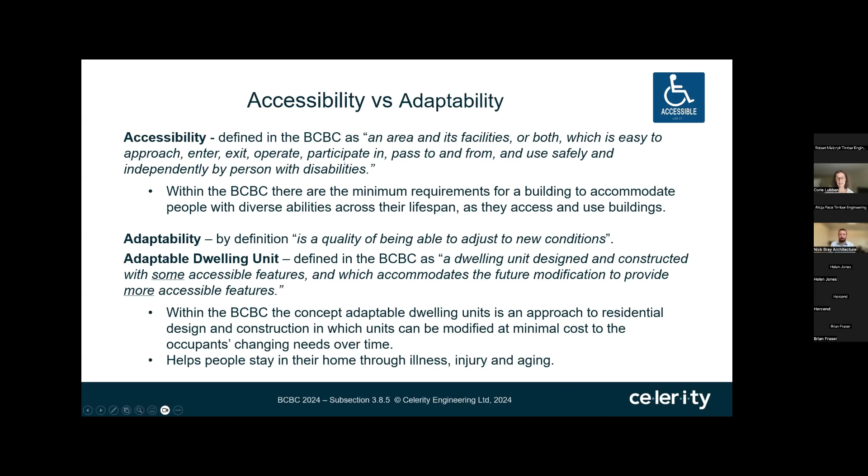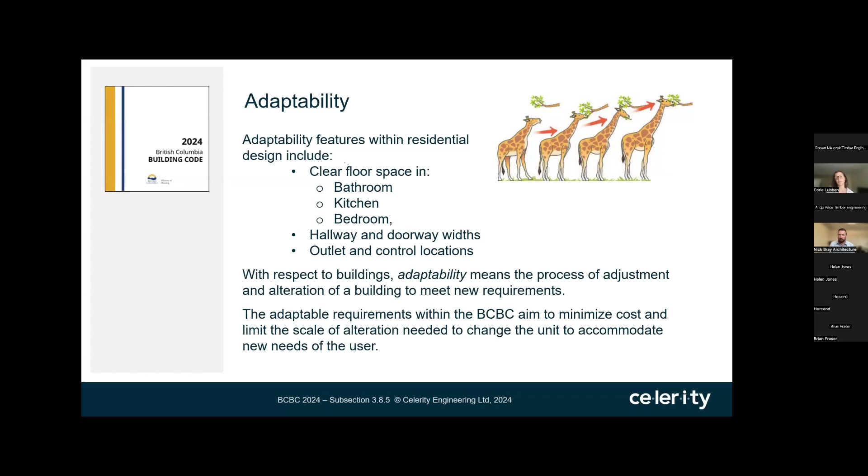Some requirements we're looking for are heavily focused along clear space, thinking back to the intent of these adaptable units and being able to accommodate future modifications. Clear space isn't something we can just magically create, so a lot of the requirements focus on providing that clear space, concentrated in the bathroom, kitchen, and bedroom. We're looking at hallway widths, door widths, and locations of outlets and controls. The adaptable requirements aim to minimize costs and limit the scale of an alteration needed within the unit to accommodate the user.

The adaptable dwelling unit requirements can be found in subsection 3.8.5. They are applicable to one-story dwelling units served by an accessible interior public corridor and an accessible common building entrance. Moving forward, as of March 10th, 100% adaptable units will be required in residential apartment buildings over 2 stories, or residential buildings larger than 600 square meters. This is a significant increase in impact on our designs. The micro suites we've been seeing may no longer be feasible based on this new clear space required throughout.

I want to emphasize these requirements do not apply to detached houses, semi-detached duplexes, triplexes, townhomes, row homes, and boarding houses. There is a requirement for those building types to have at least one bathroom with walls reinforced to accommodate future installation of grab bars, but aside from that, it's not the intent. I also want to highlight that these adaptable unit requirements don't align with the VBBL at this time. We know the Vancouver bylaw is coming up with a new edition shortly, and we're hoping they will align, but like everything, we'll know it when we see it.

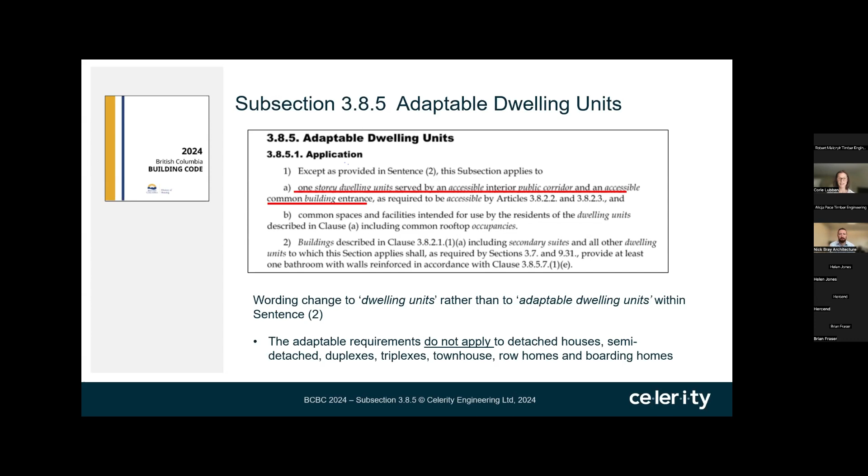Moving into the construction requirements, there's not a significant change here. This article simply states that the construction of adaptable dwelling units will conform to the subsection and the accessible requirements. What we do see is an inclusion of clarification.

All this clear space required for different parts of the building is now permitted to overlap. Whether it's a turning radius within a bedroom, a door clearance, access to the closet, or a pathway, as shown in the picture on the left, it's all clear space. We can use that for anything—we don't need to separate each individual component of clear space.

Within this article, there's also a little bit of clarity on what rooms apply. It doesn't require specific rooms in a dwelling unit; it just states if there are rooms and they're within here, they should be designed to be adaptable.

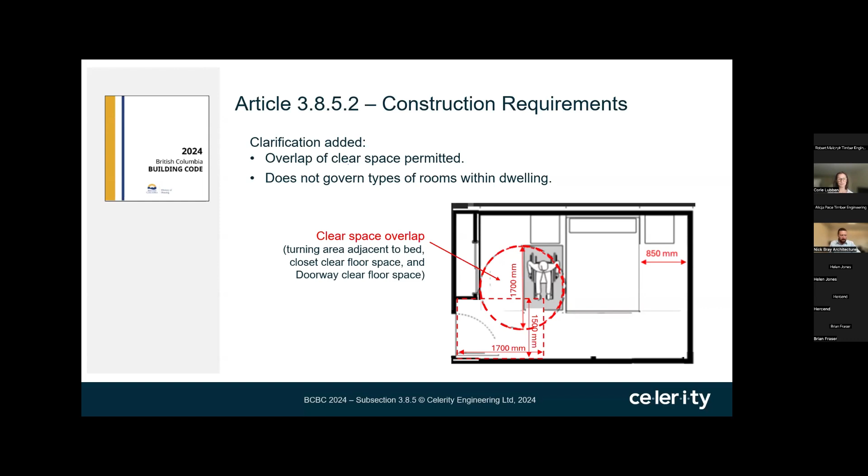Next is the building access requirements found in Article 3.8.5.3. This states that access is going to be provided to common areas, spaces, and all common interior and exterior paths of travel serving the adaptable dwelling units. Anything not intended for residents—common spaces and paths—are excluded from this. There's an inclusion for increased lighting to 50 lux in the floor area for common corridors and passageways, which exceeds the 10 typically provided. There's also a provision for special outlet boxes in the adaptable dwelling units, for the future provision of strobes.

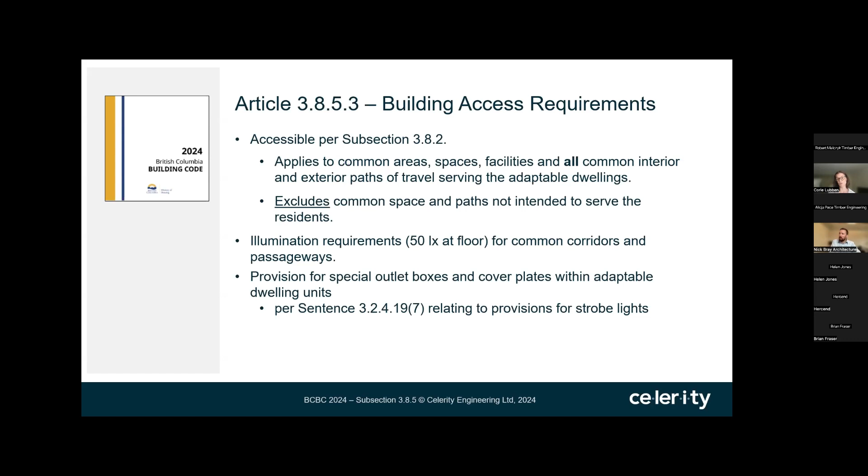For doorways, we see a revision here. This is consistent with the rest of our design requirements in 383, but the 850 clear width is required not only at the entrance door, but with interior doors as well. As shown on the top right of the screen, this reminds us how we measure that clear width—it's the clear opening, from the stop to the open part of the door.

As with all doors, we need a clear space around them. This article references and is consistent with the design requirements in 3.8.3.6. If it's a pull door, we need 1500 by 1700 millimeters, and as shown in the picture, the orientation of this clear space isn't fixed. As we move to the push door, the orientation is fixed—we need 1500 perpendicular to the door, and the clear width parallel is 1200.

There's a provision allowing you to reduce these widths if a power door operator is provided, or even just provisions for a future install of one. You can reduce it to 1500 still perpendicular, but reduced down to a meter parallel to that door.

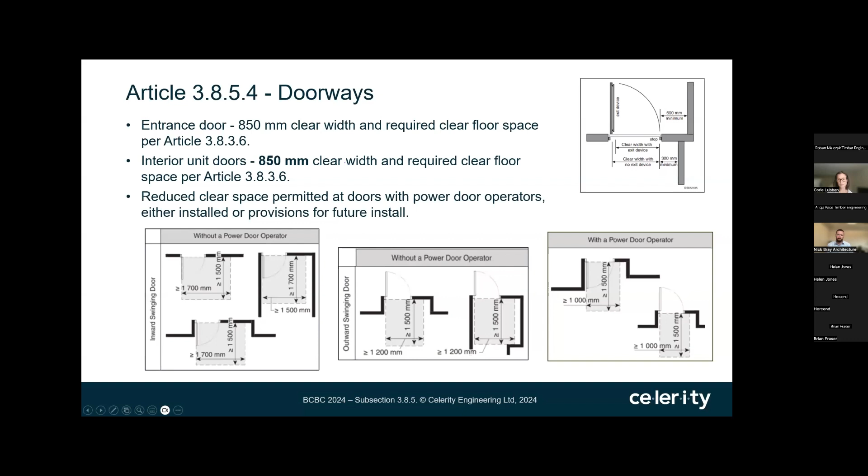And then we have some hallway and corridor requirements. This is new inclusion into the adaptable unit requirements. It defaults back to the requirements within 3.8.3, our adaptable or accessible width of 1 meter. This was an interesting inclusion, and we don't see it a lot throughout other buildings because we're governed by our egress width of 1100. But here with the adaptable dwelling units, these requirements apply within the suite, so we'll be looking at that 1 meter for corridors and hallways. There is an allowance for that to be reduced to 850, just for small indentations of 600 millimeters or less.

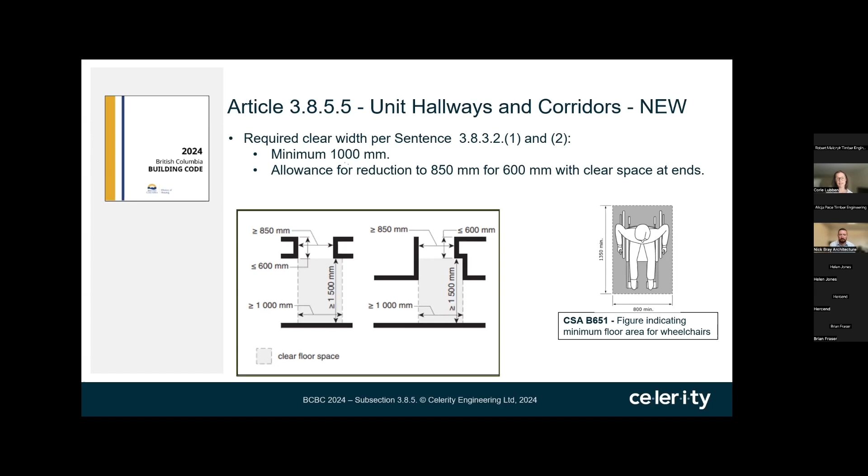Bedrooms is another new one. It requires that 1 bedroom in an adaptable unit be provided, consistent with the requirements in the code. This bedroom should be designed to accommodate a bed that sleeps 2 people. Consistent with our occupant load, we have 2 people per sleeping room, so a bedroom designed to be accessible should accommodate a double bed.

The requirements specific to the bedroom look for a clear space of 1700 millimeter diameter, or 1700 by 1500 millimeter clear space. The wording within this article is a little vague, and it says it could be adjacent to the bed. When you further read into the notes, it seems like the intent of this is to help with the transfer into the bed, so adjacent to the bed seems like a logical and helpful location, but again, that's not specifically written in the code.

The next requirement for a bedroom is a clear pathway of 850 wide, and this is not to be obstructed by furniture, just to provide use of a bedroom. This would be applicable, especially if there was a window or something on the far side of a bedroom. Everyone needs to functionally use that space.

And then the last requirement within a bedroom is closets - the clear width of a closet opening, 900, and then a clear space in front of it, similar to that 1700 millimeter diameter or the 1700 by 1500 millimeter open space. Again, this references our allowance for overlap, and as we can see, this is a large area provided, so overlap of those spaces is permitted and definitely beneficial when designing a room.

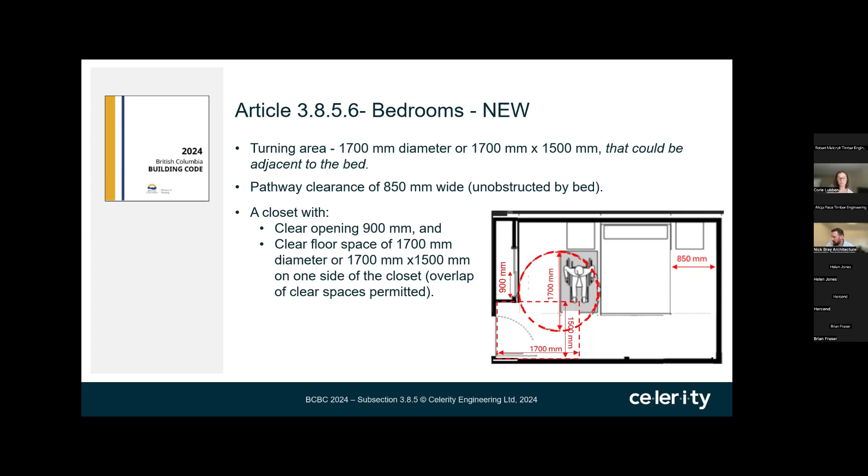Bathrooms. The design of a bathroom often requires a little bit of extra attention. We have more plumbing, different fixtures that come into play and that may need replacing. So the goal here is just that if we have to retrofit a bathroom, we can do so without major renovations. The requirements within this article lean towards a clear lateral transfer space beside a toilet.

Again, more room - we have the location of the water closet within a proximity to an adjacent wall. This is where we'll have the future grab bar locations. The other requirement is for plumbing systems to accommodate future installation of an accessible sink, an accessible shower or tub, and these are not permitted to impede the use or space of other fixtures within. So plumbing systems, as clarified in the notes, address the water supply, drainage, and venting systems. Again, we just want to be able to replace the systems without major impact and redesign.

This one has been brought to our attention, especially drains - a drain for an accessible bathroom sits a little bit different than a drain for a shower or bathtub. So these things caught early and designed early can really be beneficial. The last requirement is that we have walls reinforced for the grab bars, adjacent to the toilet, as well as the shower and tub.

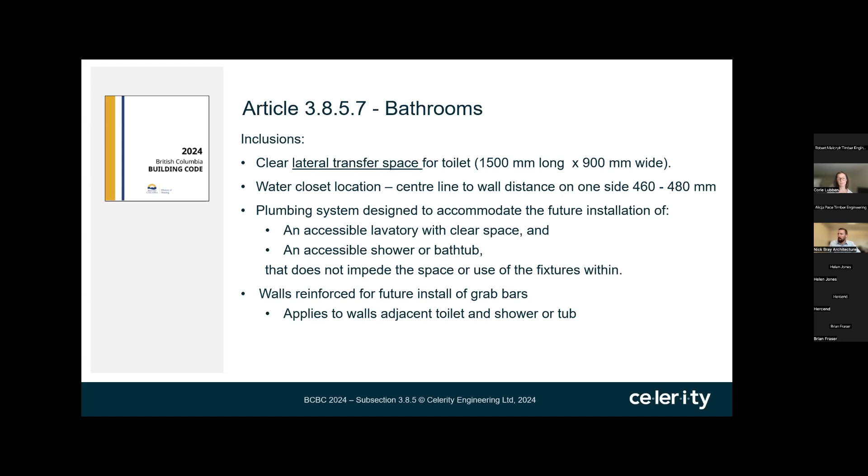And then we have kitchens, another area we need to accommodate with adaptable requirements. There is a requirement within here for the sink and cooktop location - it says adjacent or with a continuous counter. This one is in the code just for usability; I'm not sure how strict we are on this. We have not seen these types of requirements for placement of these two features in a kitchen. No, the CSA B651 doesn't specify the location of these two fixtures, so if you had a parallel kitchen, one could be on one side and one on the other. But based on the code, adjacent typically means touching, so we're just going to be conservative and assume they're all going to be on one counter, either beside one another or adjacent.

The other revisions within a kitchen, we need clear space - again back to the 1700 diameter or 1700 by 1500 millimeter. This is usability within the kitchen. We want it designed to accommodate the future install of a kitchen sink, so here the focus would be on knee clearances and locations of the plumbing, vent, and drain.

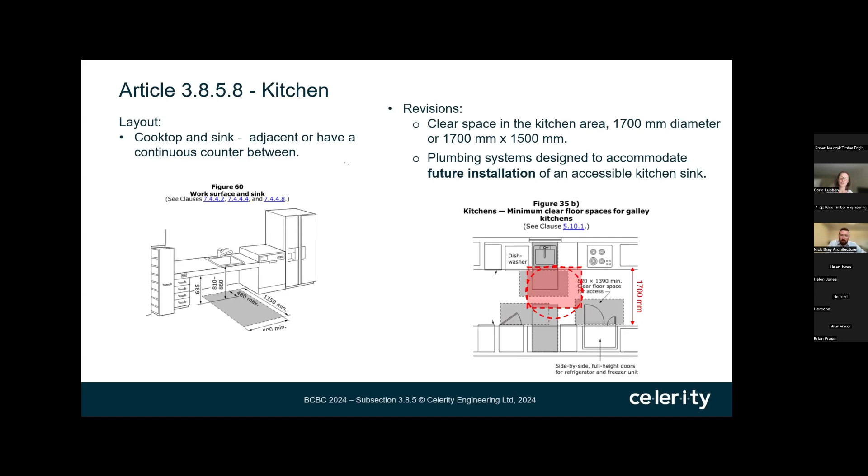When we talk about kitchens, we often have a design that includes that popular island feature. Is that still possible? It comes down to the interpretation between fixture and furniture. In our opinion, a design with an island is definitely still possible, but we'd want it on the furniture side so it could be removed without impacting functionality. You wouldn't have appliances, sinks, plumbing, or electrical going to it. We'd have finished floor underneath so it could be removed and clear space provided. This is open for interpretation, but it seems to meet the intent—a furniture island would be permitted, not necessarily a plumbed-in fixed one.

The last requirement within the adaptable units falls on controls, switches, and outlets. There's really no significant change here. Our reach requirements have been lowered—the minimum location is now 400 millimeters, down from 450, and up to 1200 millimeters above the floor. This applies to things that we're using, and it does exempt controls dedicated for equipment or appliances.

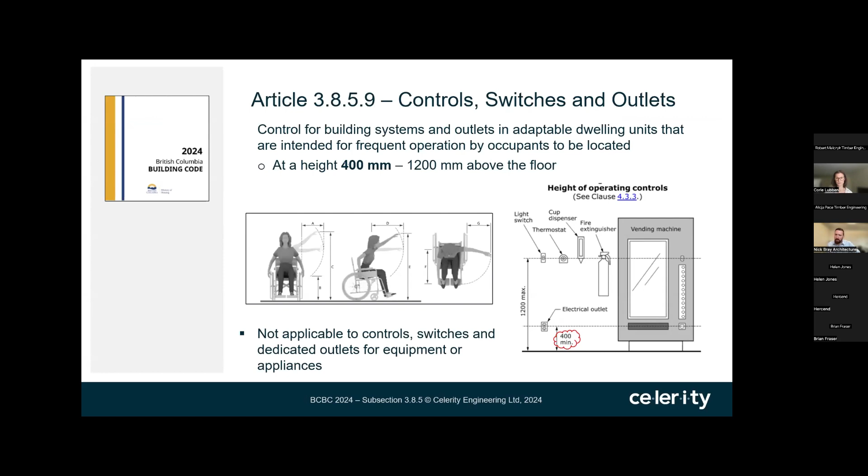As we conclude the adaptability requirements within 385, I wanted to bring attention to other design aspects worth considering. One is window location. The BCBC has no requirement or reference for window location, but the CSA B652 adaptable dwellings standard references that one window should be provided in each room, located not higher than 750 millimeters from the finished floor, with an exemption for bathrooms. This requirement is reiterated in the VBBL. Here we have one window, in the living room, located 800 millimeters above the finished floor. It's not in the BCBC, but it's a functional and significant item if someone in a unit wanted to make a revision—so these are things to consider as we move into design.

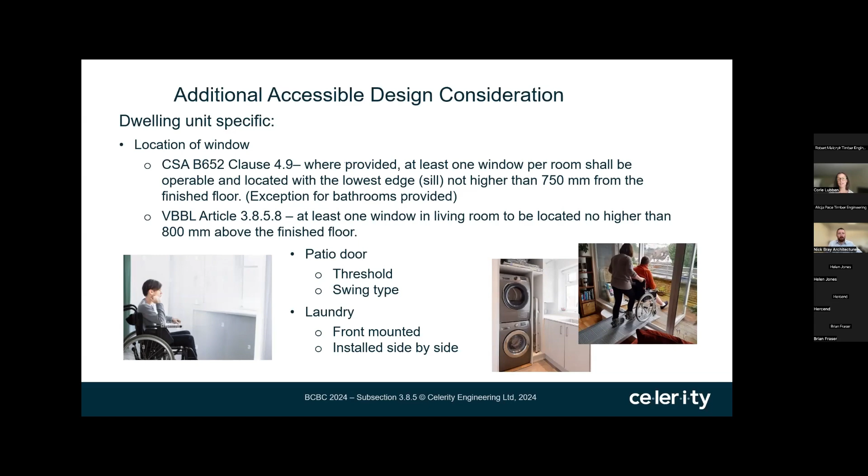Patio doors often bring up another issue. It's a gray area—there's no requirement for it to access directly onto the balcony or patio, though looking at the patio door threshold and swing type early on may simplify the unit and make it designed for all. Another funny thing people notice in units designed to be accessible is stacked washers and dryers—unfortunately the upper unit often isn't reachable for people with limited mobility. We're not saying they need to be side by side, but maybe allocate space so that option could be available. These are mindful design criteria, not enforced, but things to keep in mind.

Now I'd like to reiterate the accessibility design standards and references out there. We now have the CSA B651 2018 edition, the accessible design for the built environment. This is now included in the 2024 BCBC as a direct reference, making that standard enforceable. There's also a new 2023 edition of the B651 that didn't quite make it into our 2024 code, which gives us a chance to look forward and see what's coming.

This table highlights some of the clear space requirements and differences. The turning space bubbled on the far right is 2.1 meters, whereas right now a lot of designs incorporate 1700. When we feel that 2.1 meters is big and try to avoid it in our design, remember that based on design and user feedback, 2.1 meters is preferred—so we shouldn't grumble about giving up the extra space versus 1700. Within the 2023 edition, all requirements associated with accessible dwelling units have been moved into a new standard, the B652. Again, these are just standards used as guidelines and not enforced.

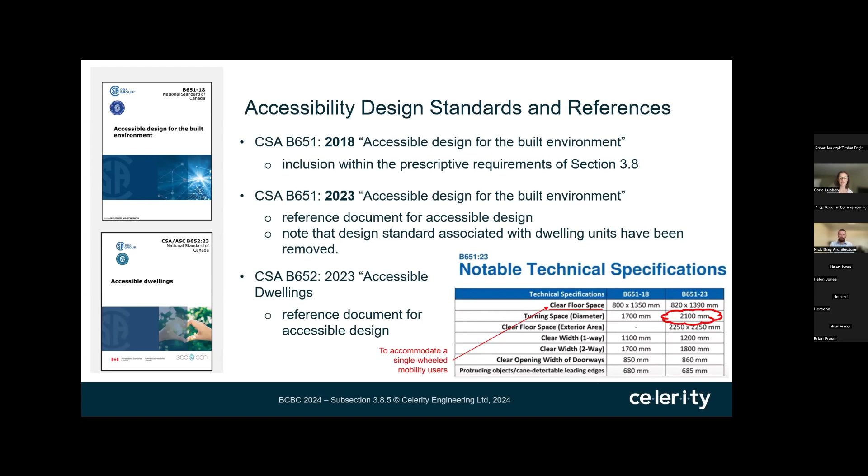Before we close, I wanted to touch on impactful changes within the accessible requirements. Dwelling units are required to be served by an accessible path of travel, both interior and exterior. Within section 3.3.2, accessible paths of travel, there's a new requirement addressing long corridors, which depends on the width of your corridor. There's now a new inclusion for a turnaround or mobility zone, which comes into play when a corridor is more than 12 meters in length.

And if the corridor is not 1500 or more, we do need to incorporate a turning zone at the end. Once we have corridors greater than 24 meters, we actually don't care about the width of that. We need this turnaround zone or maneuver zone regardless, and that has to be incorporated at intervals not greater than 24 meters. It's a 1700 by 1700 millimeter space.

Secondly, I just want to highlight the changes in the exterior walks. We have an increase in our width required on the outside of the building. We're looking now to provide 1600 millimeters. There's added clearances around entrance doors on the exterior where we go to that 1700 by 1700 millimeters.

And we do have a direct reference here where we are required to comply with the CSA B651 requirements for exterior walks, and the provisions there include a broader scope than previously within the building code. We're looking at overhead obstructions, separations from vehicle walks, specific requirements for tactile attention indicators and where bollards are, and separation distance between them. Just a lot more things to incorporate, and this isn't to go over them all, but just to be mindful we need to dig into these deeper as we move forward.

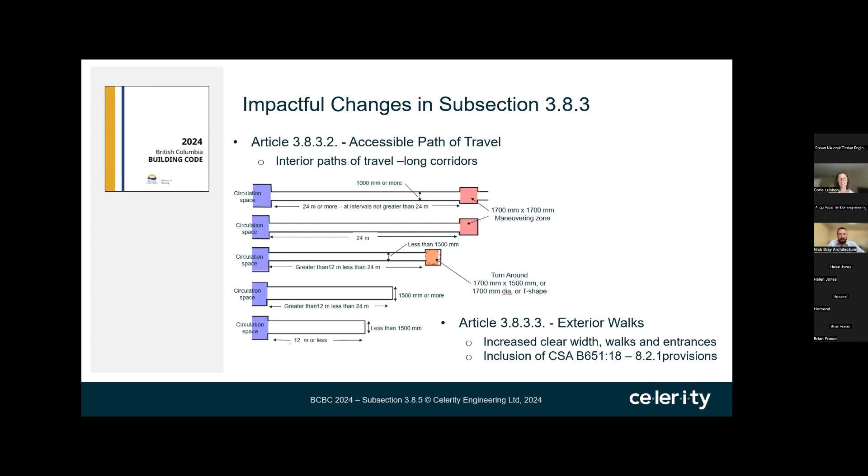And I think that sums that up for a quick deep dive into the adaptability requirements from our end.

I'm not sure if we want to take any questions now or if we're just going to leave those to the end. We've got 5 minutes now to just talk through some questions here that we have. But before we get into that, I just want to say that there's still a lot of things we're unclear about that we need clarity on from BSSB, from the BC government. We can only present what we actually know to be written in the code right now. But I know, for example, there has been talk about the requirement for a double bed and the requirement for a space on both sides of the bed. It's looking towards, and I'm not sure if it's been confirmed or not, but it's certainly been discussed, talk about that only being required on one side of the bed and it not necessarily being a 2-person bed that is required. Again, we can only really present what has been written in the code at this point or confirmed at this point. But just be aware that we are seeking clarity on a number of issues, and maybe we can keep you updated with those items.

Just to start on the questions here, a question from Tina: does the BCBC include requirements for windows that are accessible? For example, latches for swing windows are at the height that a person in a wheelchair could reach to provide fresh air to a room. I think that's kind of just built into it - obviously, as we said, the BCBC doesn't have a requirement specifically for windows. The VBBL and the CSA B651, who reference a window in their location, they do say operable. So if it's an operable window, I think that leads to the fact that whoever is trying to use the window would be able to use the operable features of the window.

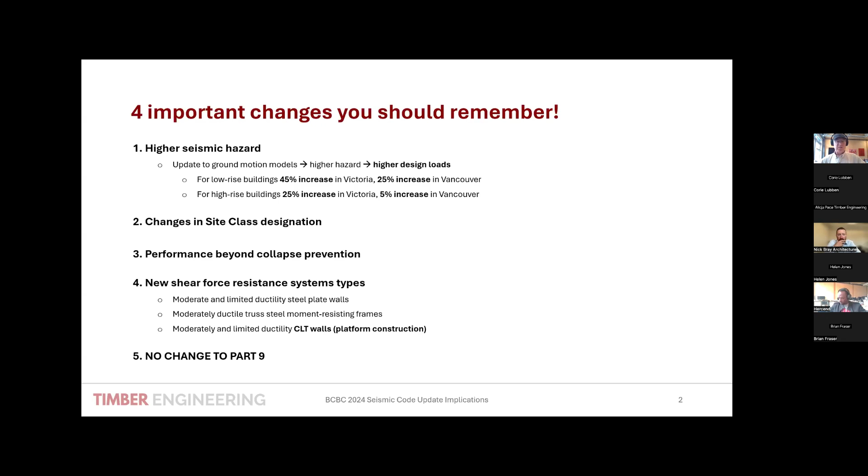So we have designed CLT shear walls for the last 15 years. Now they're in the code, and now there is this big change. And no changes to part 9.

So what does it mean for developers, architects, designers? Buildings will become more regular in geometry. There will be more walls lining up, especially shear walls. There will be more shear walls. Transfers, irregularities, they will become much more expensive and harder to design.

Other systems like CLT shear walls will be mixed together with load-bearing wood framing walls because it will be much harder to use these wood framing walls as shear walls, even with the rods. We already see projects with tons of built-up posts. There simply will be geometries that it will not work.

And the other big thing is that the geotechnical engineers will be hired at the design stage. More and more of this is already happening, but now this information will result in huge savings to the design.

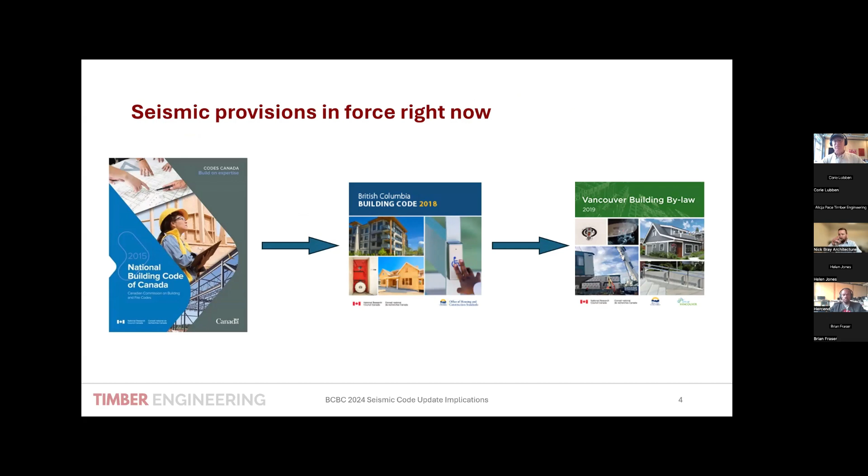So that's how it goes from National Building Code into the BCBC, into the Vancouver bylaw. That's how it was before. And that's what's going on now.

So we are already getting into BCBC 24. We still don't know exactly when Vancouver will adopt it in the bylaw. But the process is the same as last time.

So how was it before? We started with 1941 with the first national building codes in Canada. Then we went pretty much to the 1980s. In the 1990s, when I graduated from UBC, we were starting seriously to design in seismic, but in reality it was...

The 98, 99, and especially the changes into the StructE designation, which we had to pass these additional exams in early 2000s, a lot of it was about seismic. So in the 2000s, we really started doing it more.

And now with 2020, 2024, what's important to remember here is that the load path and the requirement for this load path was always kind of stated. Now it is in the code. So now I will pass to...

Alicia, and she will be talking about the key concepts. Hello everyone, I want to just introduce a few technical concepts that are important for us to really understand where all of these big changes are coming from.

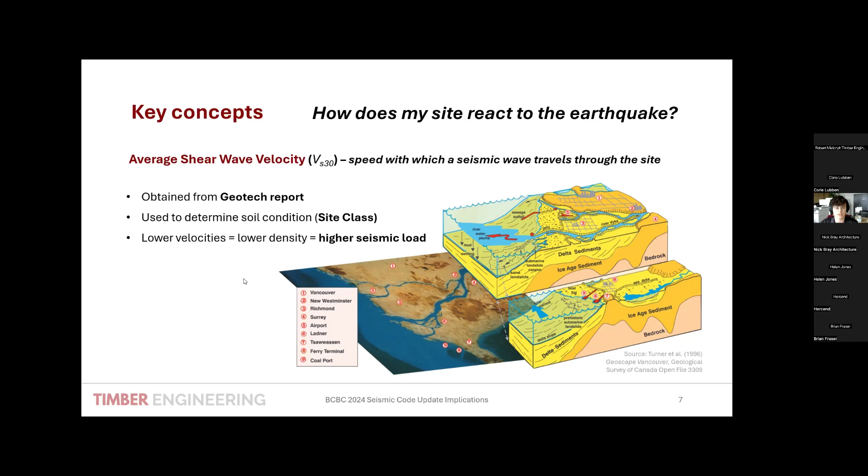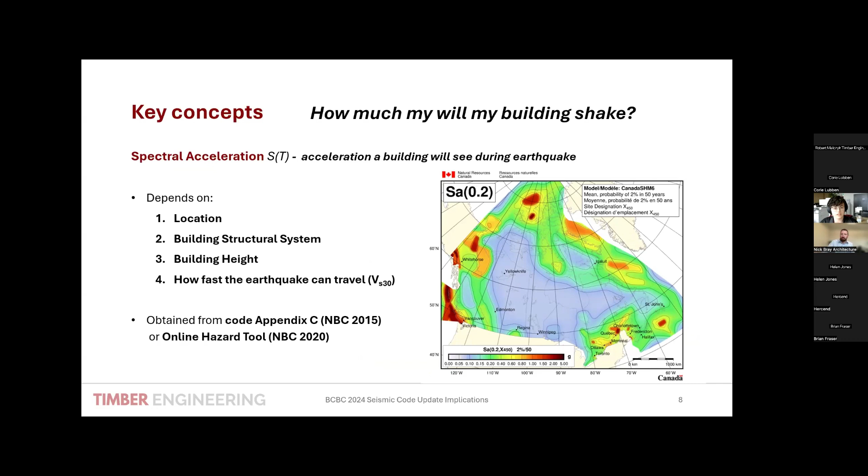Then the second important concept is, of course, how much will my building shake? This will depend, of course, on the location within the country, with higher seismic zones being closer to the potential epicenters. It will also very much depend on the structural system, the height of the building, and the concept I've just introduced, how fast that earthquake can travel through our site.

Typically, all of this is encompassed in our spectral acceleration. And that value of spectral acceleration, historically, we've been able to access it from an Appendix C, but now from the 2020 NBC and consequently BCBC 2024, this will be done through an online hazard tool.

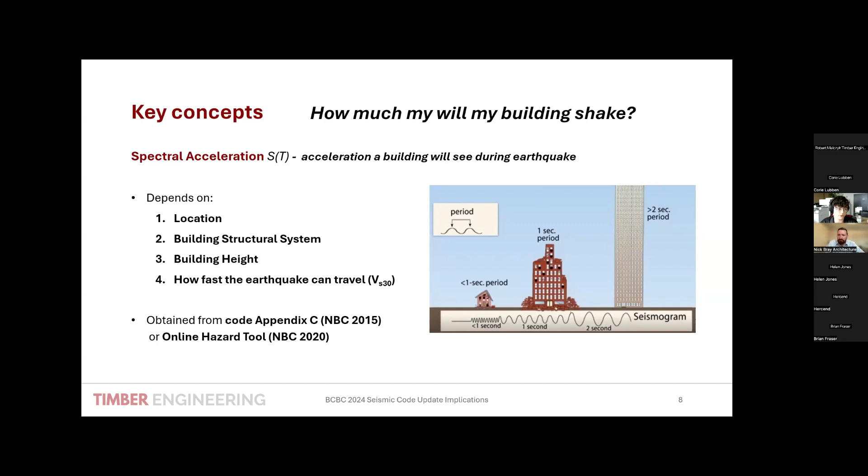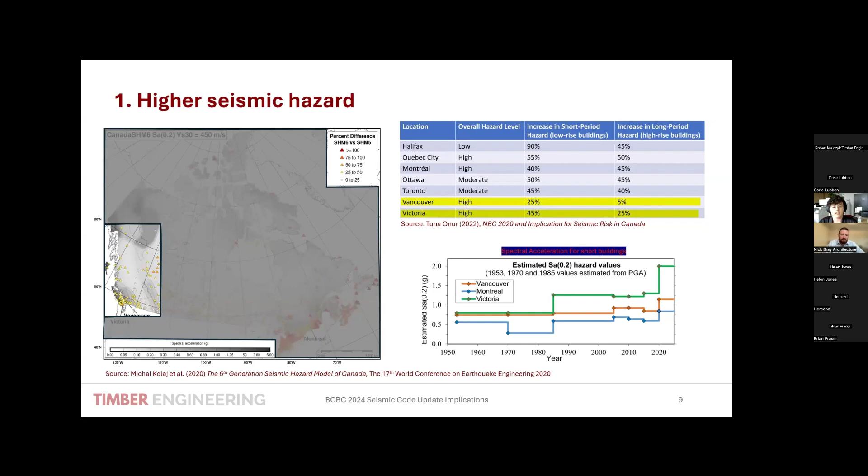Just to zoom in a little bit on what changes are to the seismic spectral acceleration values. This is the map on the left-hand side, where you can see across all of Canada. But of course, we're focusing a little bit more on our local BC. And as Robert already briefly mentioned, when we think about the two most important cities for us locally, especially seismically, Vancouver and Victoria...

25% increase in that spectral acceleration for low-rise buildings in Vancouver and 5% for high-rise. And then for Victoria, this is 45% for low-rise buildings and 25% for high-rise.

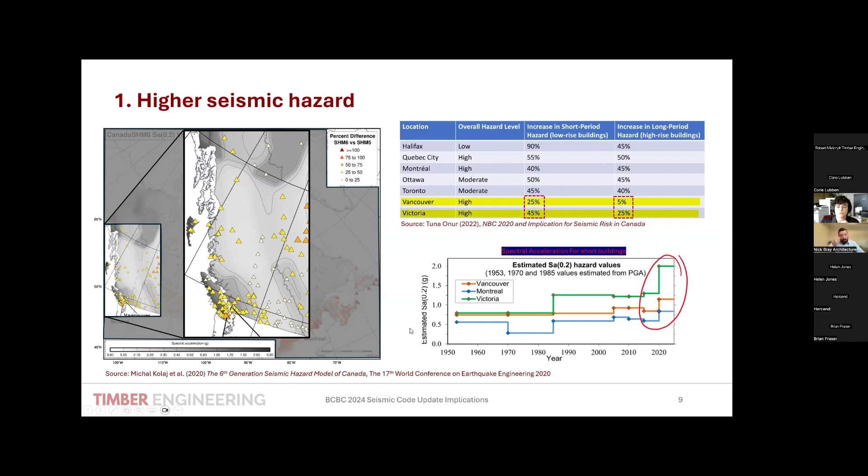And just to underline, because this directly impacts the spectral acceleration values, it directly impacts the calculated loads on the building. I also would like to highlight that, as you can see at the bottom right corner, this is one of the biggest peaks that we've seen in those ground motion models in terms of hazard values throughout the years. And therefore, it is going to impact the way that we will design quite significantly.

Going back to that online hazard tool, the ground motion models are going to be much more site-specific now. We used to have just under 700 data sets in that appendix I mentioned. Now we have over 300,000 data sets, so there will be variation not just between cities, but within the city itself. It's going to be very focused. This is why we have the online hazard tool instead of an appendix, because it's incredibly hard to fit 350,000 data sets in an appendix.

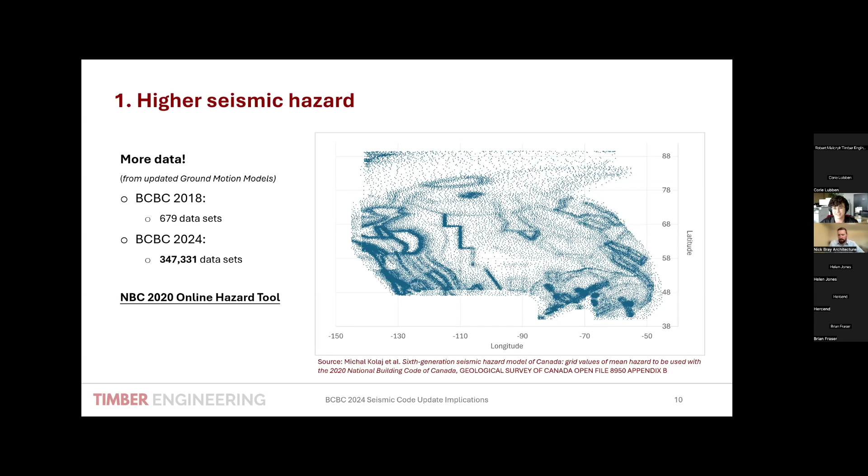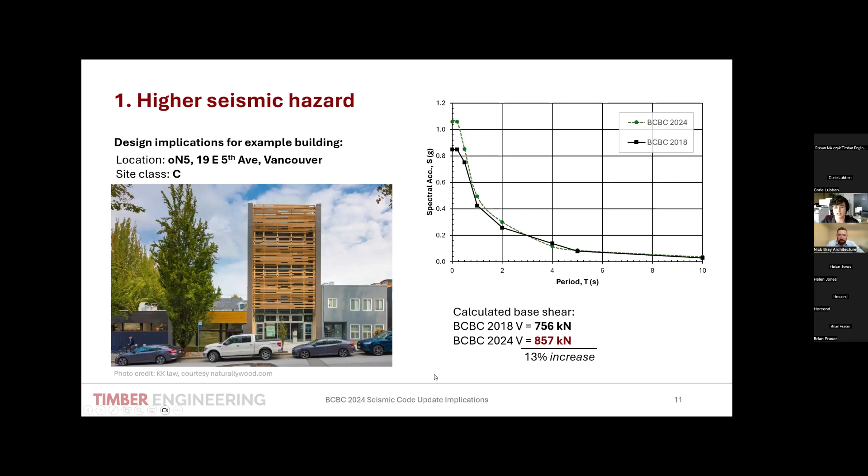Just to show how this will work for an example design, you can see on the left-hand side an example building, our office, localized in Vancouver. Despite the changes being summarized as a 25% increase for Vancouver in general, when we localize for the specific site, recalculating between the old and new hazard values, we see around 13% increase in base shear values. So it's very important to know the site specifics exactly, and we can preserve a lot of design efficiency that way.

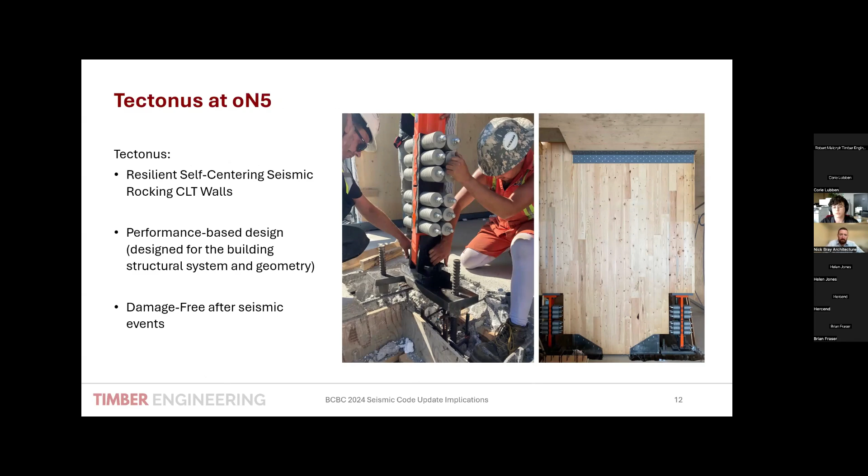In our building, foreshadowing what Christian is going to talk about in a minute, we already designed this structure for performance that is damage-free after seismic events, thanks to the technology called Tectonus, which is installed as hold downs in our shear walls. It allows for recentering of the structure after a seismic event, especially at the lower seismic events that are more likely to happen more often.

One really important thing for preserving the efficiency of our design is that the codes have changed, and it's now designed into the codes that it will be way less efficient for us to just use site class designation. It's still possible to do so, but code designers are really trying to encourage us, instead of the bigger brackets from A to F, to use a specific shear wave velocity.

This is exactly what Robert mentioned - in order to preserve design efficiency, hiring a geotech early and knowing the exact site class acceleration, the shear wave velocity for the specific site, will allow us a more efficient design.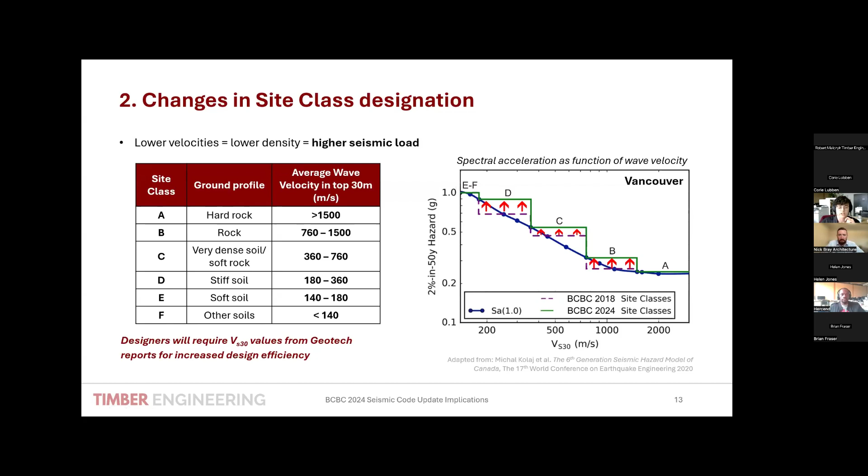With that, the code has never really given any additional requirements except when you have a different structure, like high importance buildings or post-disaster buildings. There are a few key points you have to consider, like increasing the load using the importance factor, or reducing the deflection of the building as it shakes with a reduced drift value, or basically making sure your structural system is regular, efficient, or symmetrical in order to really understand the load path.

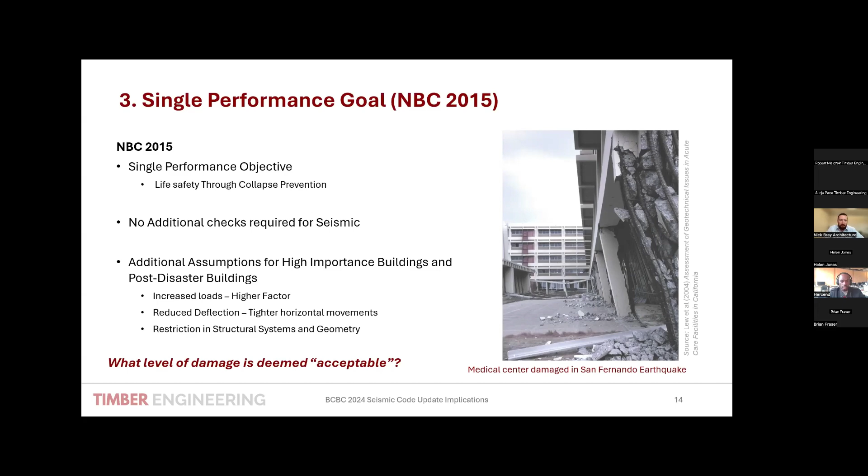So what did the code add in terms of additional performance? The code added another level of safety. In addition to making sure that the building should not collapse, there is an additional requirement that requires the engineer to also check the performance of the building under lower seismic hazards.

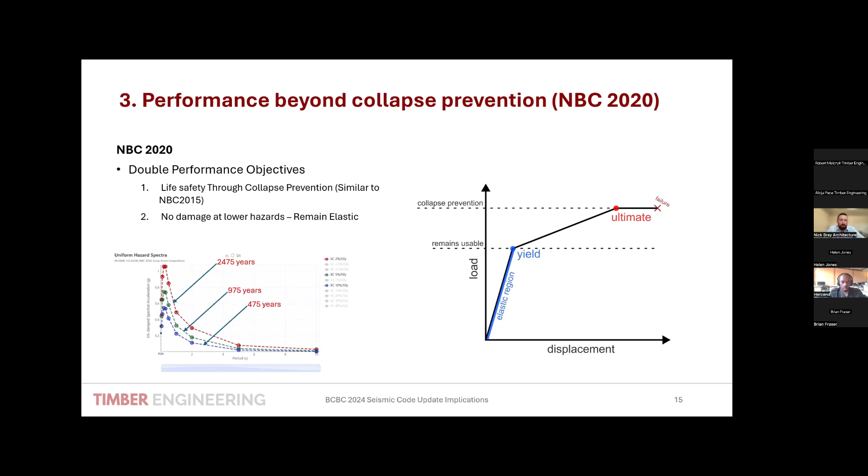So what does that really do to us in terms of design? Now that you are seeing more restrictions, more limits, and now you have a second performance requirement to meet - and as Robert and Alicja mentioned earlier, you actually have even higher forces to design for - what does it mean for the building industry? Now you have to really try to target a much more regular building, a much more symmetric building.

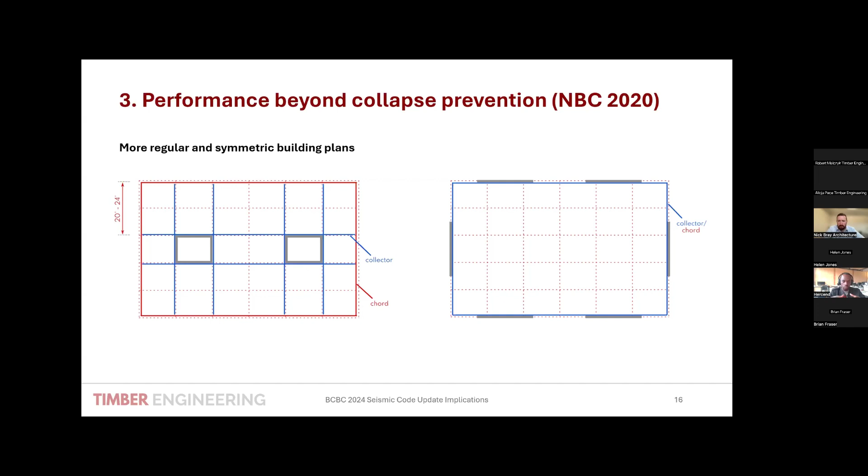You're trying to have something simple and more regular to carry those forces. The main important thing to remember here, and Robert will also mention this on the next slide, is that with those higher forces and higher performance objectives required, you actually have to try as much as possible to avoid any transfer in the lateral load resisting system. So try to have your cores, shear walls, and braces very aligned from the roof level all the way to the foundation.

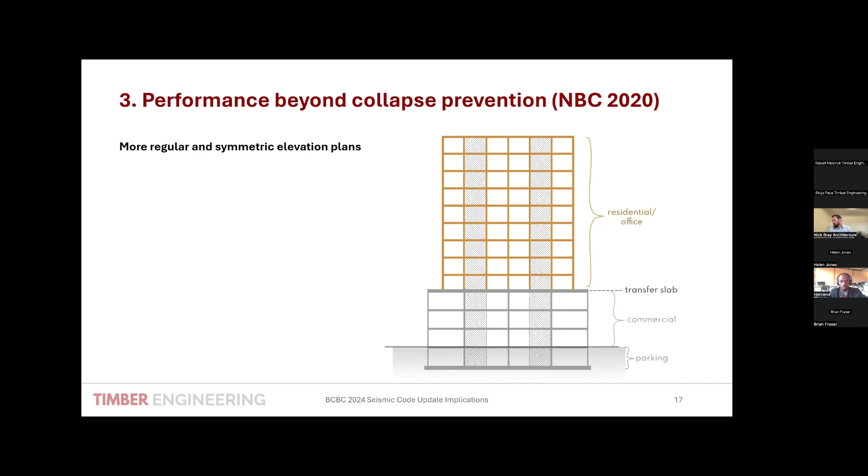This way you are actually optimizing your structure and making sure it will perform better, avoiding any increase or cost premium caused by shifting the lateral load resisting system from all directions. So these are the main things to remember about how performance will be impacted structurally from 2020.

The other important point to remember is the introduction of CLT as a shear wall. So what this means is that, yes, we've seen CLT buildings for years now, almost more than a decade here in North America and in BC. And so far, we didn't really have anything in the code that specifically gives you the Rd and Ro factor for CLT shear walls.

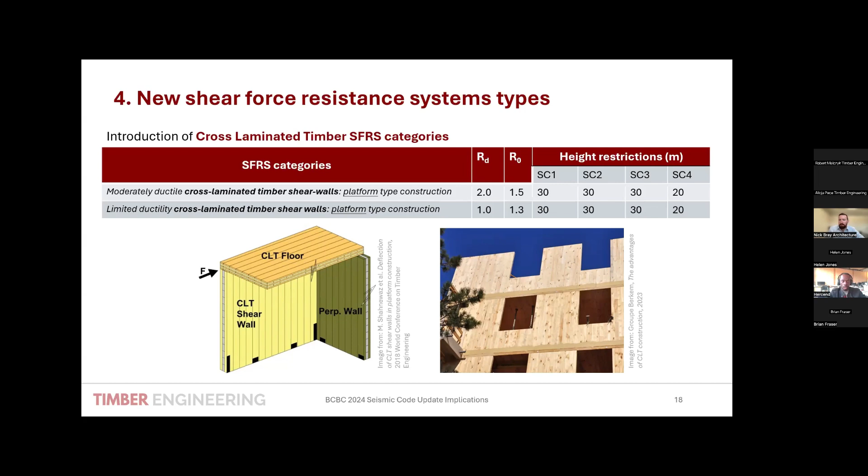Now it is in the code, which means we can freely design CLT shear walls without having to go into alternative means and methods or additional analysis. But that being said, what is in the current code so far is mainly limited to what is called platform construction.

Although this is not yet in the code, there is a lot of research currently being done at universities and different institutions, trying to push this innovation forward so it can be accounted for in the next upcoming code.

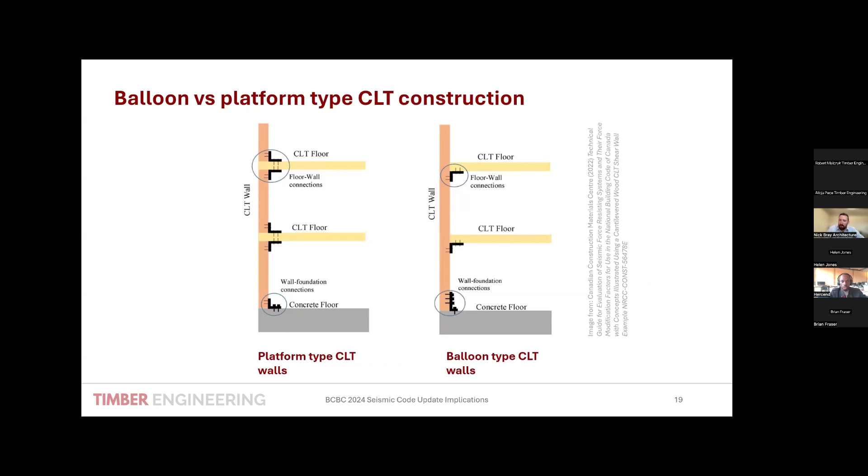That was it, and I will pass it to Robert to finish off the presentation.

Thanks. So one more time, higher seismic hazard will increase the forces. There will be a very large increase in Victoria, 45%, and 25% in Vancouver. It will be the low-rise and mid-rise buildings that will be affected much more. Now, the increase for high-rise is 25% in Victoria and just 5% in Vancouver.

The site class designation is really important. We used to only get the site class B, C, or D from the geotech. Now it's the shear wave velocity we'll be asking the geotechnical engineer for, and we need this right before the design. There were many projects I've been involved in where we just assumed site class C or D based on the area, and the geotech was hired later just to verify the allowable soil bearing pressure. Now this will not be that economical to do, so we will be changing that.

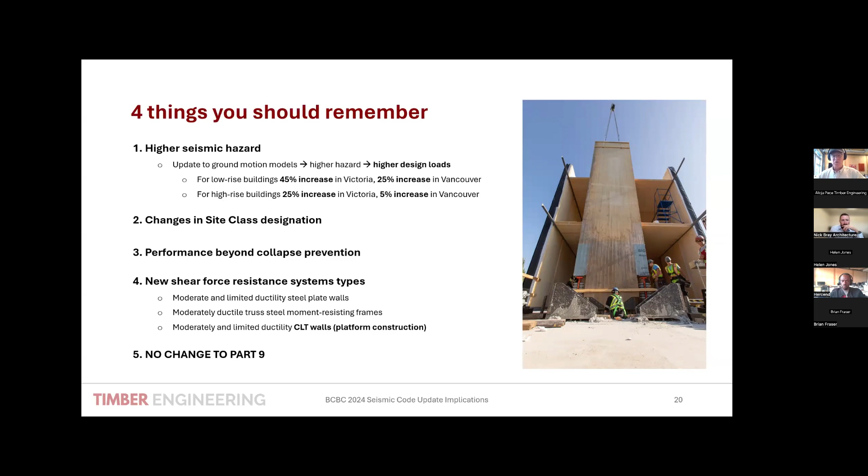Performance beyond collapse prevention is for the buildings of higher classes, so schools and community centers. They will be designed so they will not have too much damage. And then the new shear force resisting systems, CLT walls in platform construction, will be game changers. They will be mixed with wood frame, and they will be providing these new solutions.

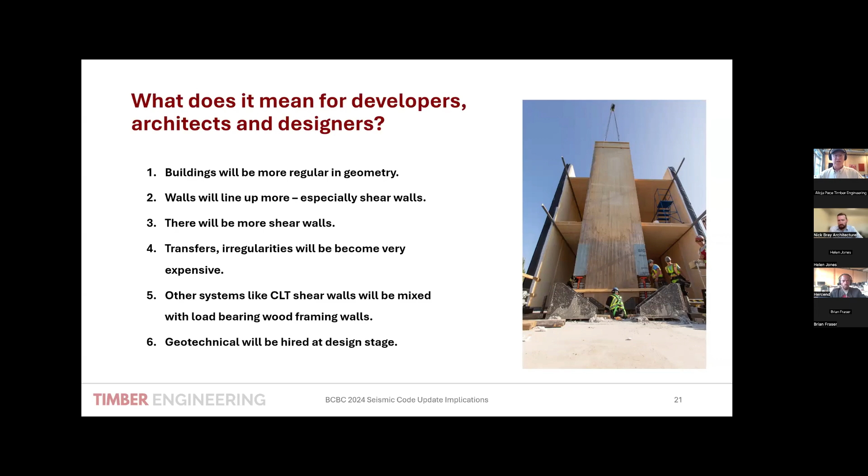Thank you. Any questions on the seismic?